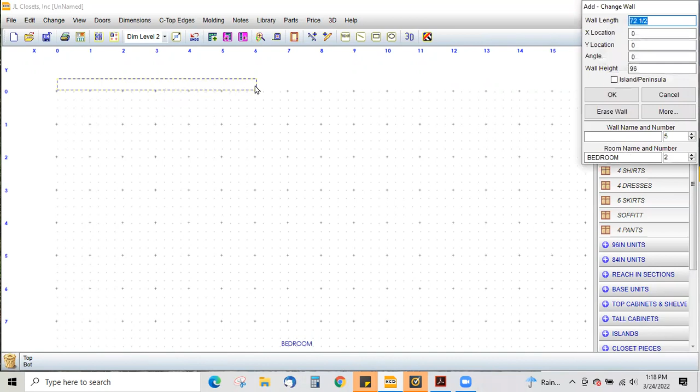All right, this video is going to cover soffits and ceiling pitches. So usually you'll have a space. I can't even say it's going to be underneath the stairs. It could be honestly anywhere. But if there's a difference in the heights, it's generally more often than not that it's under stairs. But as long as you know how to do it, then you just know how to do it.

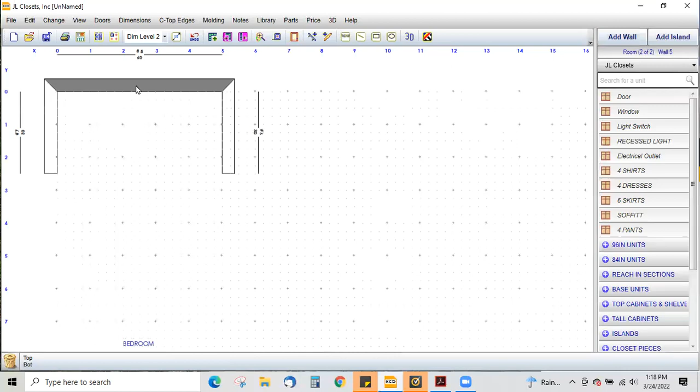All right, so usually they're three-sided. Even if they're not, this will show you at least how to use the ceiling and how to change the wall. Because the better you can show it to your client, engineering, and the installers, honestly, the better it's going to be for you. So let's assume in this scenario that this is a much taller space. Maybe this is 96 inches and maybe it comes down to 54. So I need to show that this wall height is 54 inches.

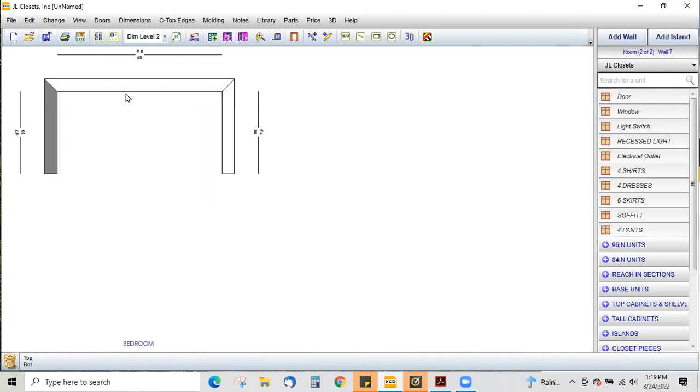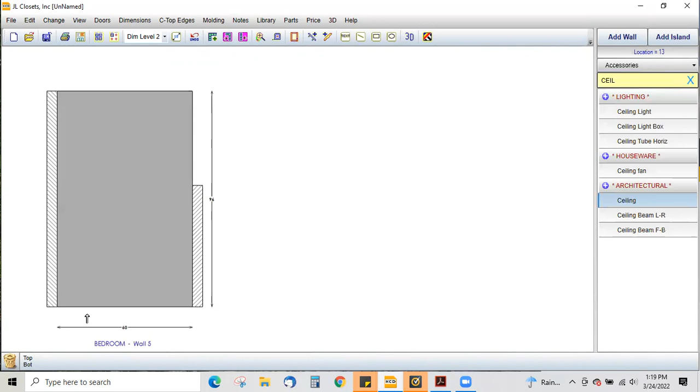So now when I look at my back wall, I can see that this really needs to be chopped, right? We can go into the accessories, go into ceiling. You actually have a ceiling, so you can design it. It's going to be based on the width here because this is a 60-inch wall. So I'm going to say it's 60 inches.

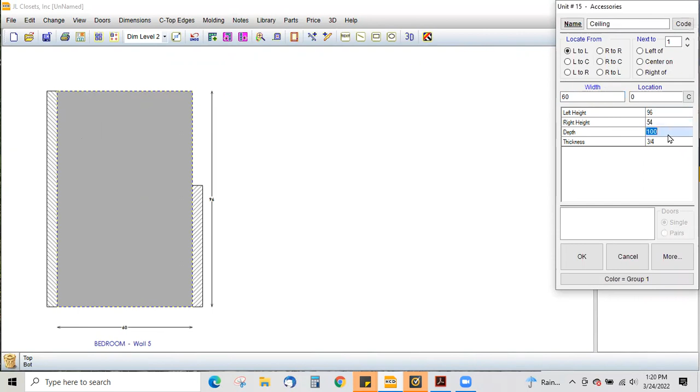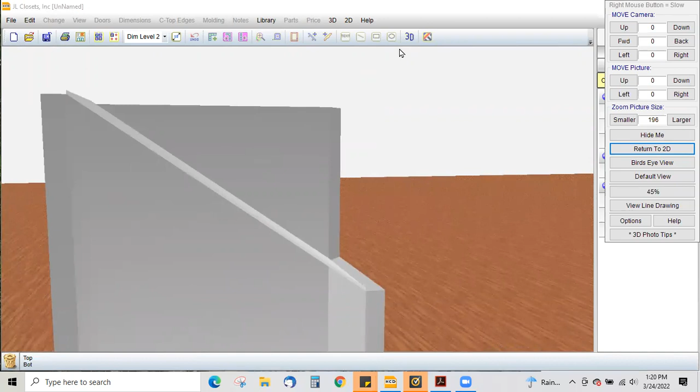When I design my space, it's 30 inches deep. I like to do it in the front view because I can see my left height is 96. My right height, we said, was 54. The depth of the space is 30. So now you can see a ceiling, but you still see the wall. And if you design on this and you put this into 3D, you'll still be able to see this funky little wall. It just doesn't look right. You don't have to do it this way, but if we're going to show it, it should be shown true.

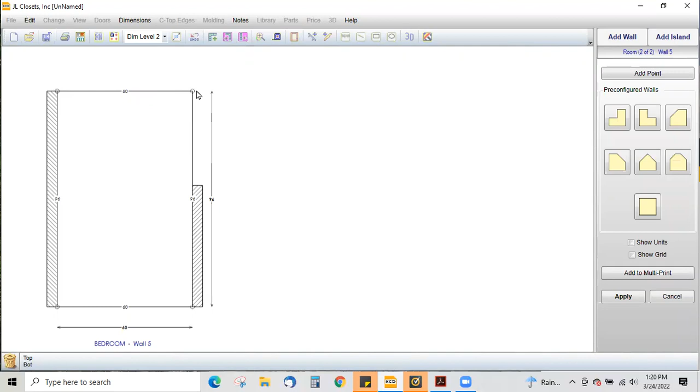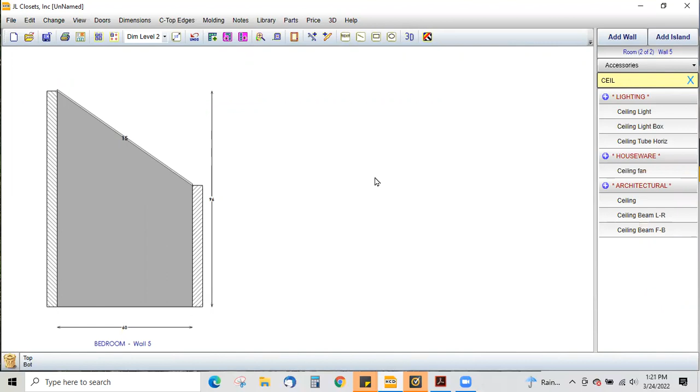So we're going to double click on this wall and we're going to click on more. You can edit the wall shape. So when you click on that, it gives you these little bubbles. I want to bring this bubble down to approximately 54 inches. When I hit apply, it cut off the remainder part of that wall. So now if I design something, now I can show it in true form. So I can put a unit underneath here. Maybe there's going to be some floating shelves, but now it's going to be a true and exact space.

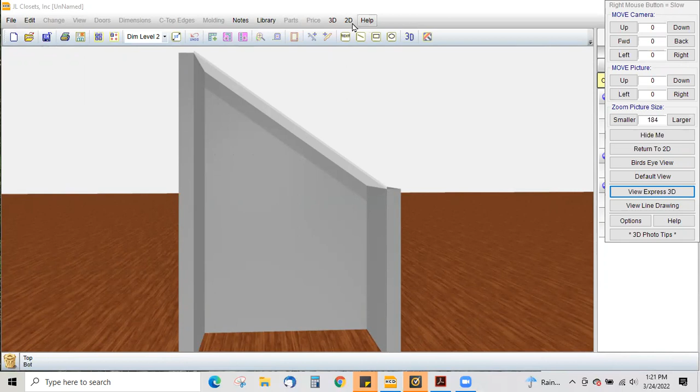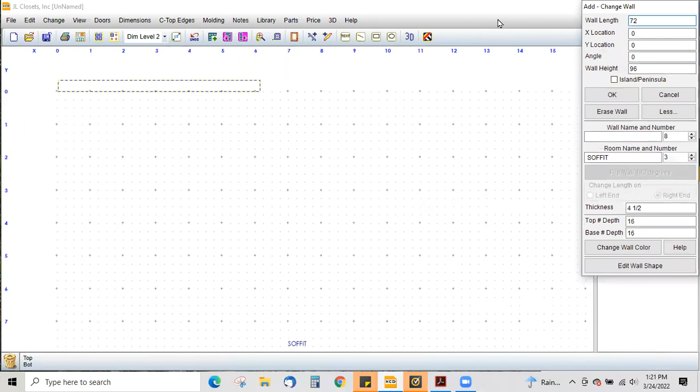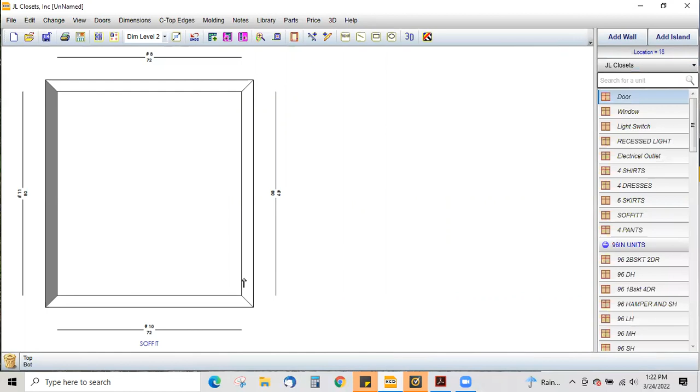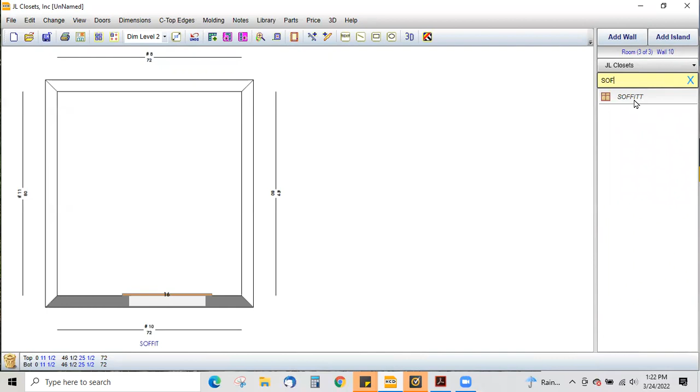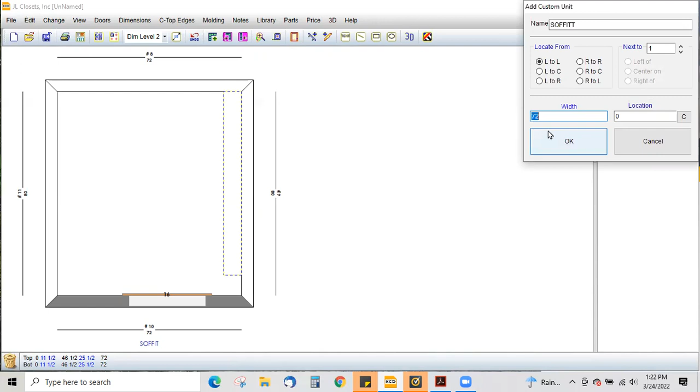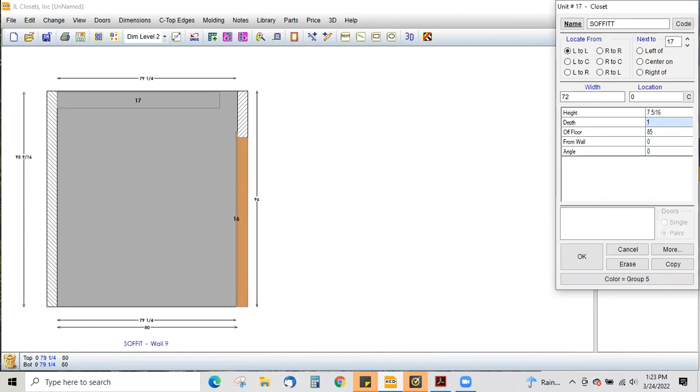But you can just search for the soffit and you can design it in. It could be the entire length of that particular wall. It could be just a portion of it. So you'll design your soffit to whatever you need to. You could also put this on the floor if you've got a bump up, like in a garage. So I'm just going to come to my front view because I can see it. You can't see it from the top view, but sometimes it's off the floor and maybe it could be wider. So we'll just say maybe 85 inches. Maybe it's 16 inches deep.

And you would generally measure these, you'll just do the math. So if you're taking your wall height measurement with a laser, you can do it to the bottom of the soffit, and then also to the top of the room. So easy math, right? If this is a 96 inch minus 85, it should be 11 inches.

Better to just design this into KCD so that clients, engineers and installers understand why perhaps you designed this one wall to be a lot less and maybe this wall a lot higher. And this has actually happened where I've seen designs and it went to the ceiling on every wall, except this one was smaller and it wasn't designed in there with the soffit. So I didn't understand. So the idea of your designs is to showcase what you can do without having to explain it.

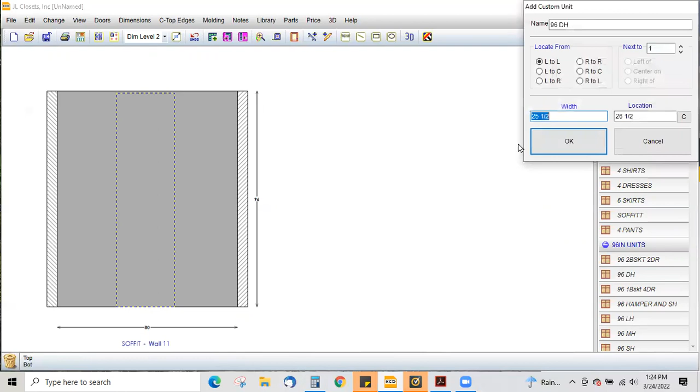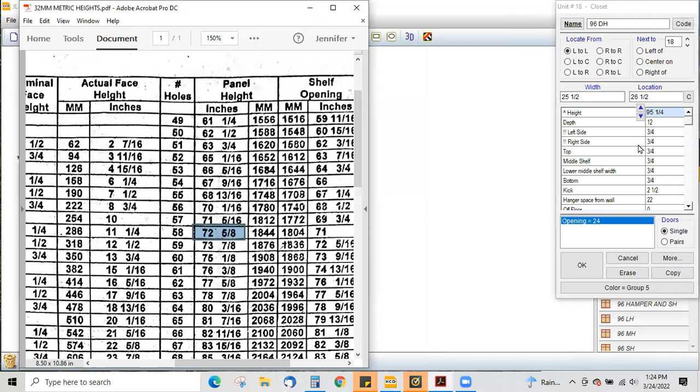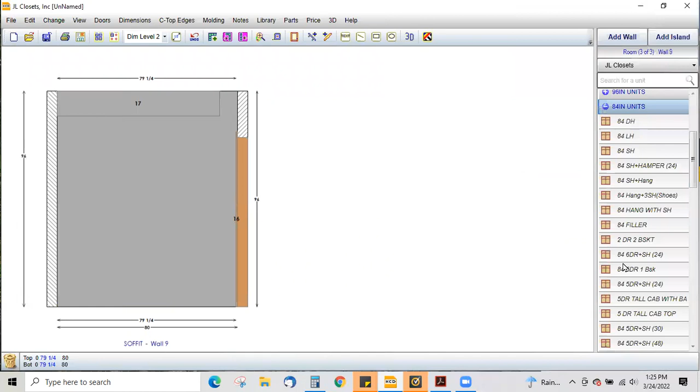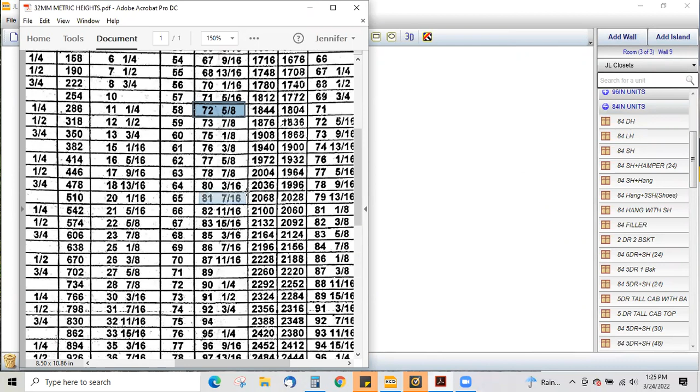So just remember too, we'll always go 3 inches below. So if we're a 96 inch wall height, I'm gonna make this 92 3/4. This is just for quickness right now. I'm going to come over here, perhaps do the same. And I'm aware that I'm not putting fillers in. I'm just showing. I'm going to use an 84 inch unit, especially since this is 85. So I'm going to come up to where my 85 is and backtrack it. I'll make it 81 7/16. So I am still 3 inches below my soffit.

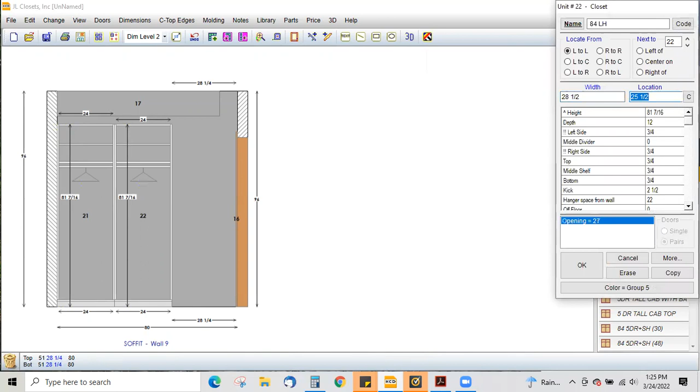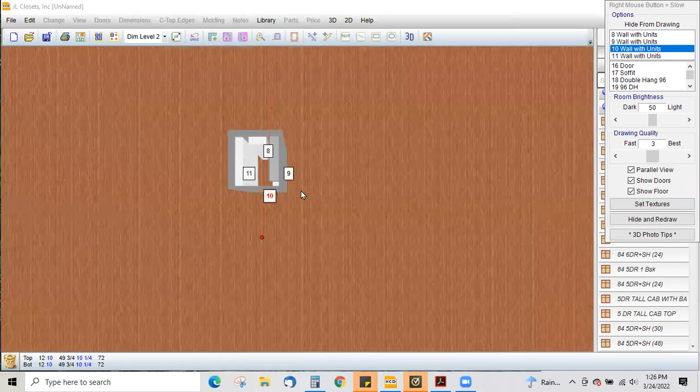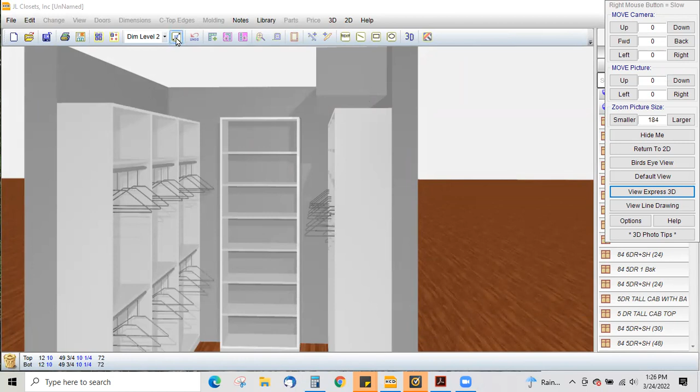So now I will put a shelf back here. I'm not putting the bridges on right now. I just want to show in 3D what this will look like. So now you can see there's a soffit there. So this is going to tell me I probably am not going to use a connector here at the top. And if I don't use a connector at this top, I'm probably not going to do one down here. I might. It just depends on the look the client wants, especially if I'm going crown to ceiling. Oh, I made a whoopsies. 92 3/4. Thought it looked a little weird.

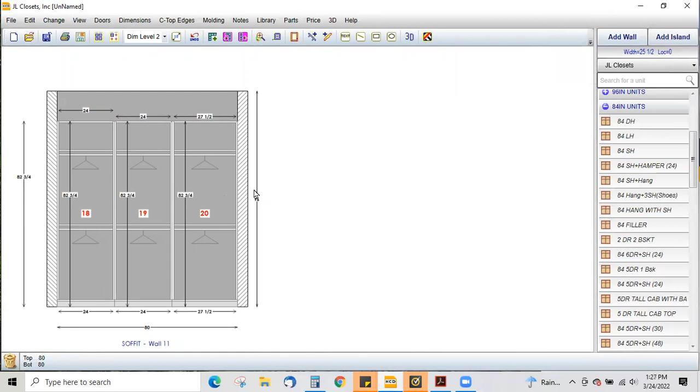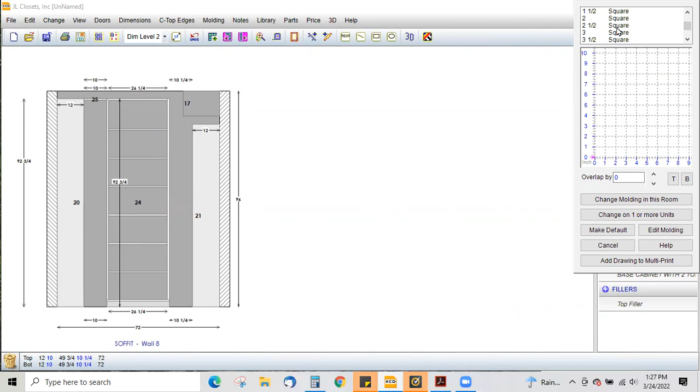So a way to do this quickly, I'm going to click on these and this guy. I'm going to change all selected units and make the height the same. So now they're where I need them to be. I will probably, just because these are the same, put a bridge up here so that when I do my molding to the ceiling, it will show properly. I'm not sure if I would use a bottom here because I'm not using one here. So I'm going to put my molding on here, my square. It's generally 2.5. I'm going to put it up here and here.

But now it can show that it's going to the ceiling. So this is what it will look like now with the soffit. If you didn't have the soffit in here, it just might look a little like, why did they do it like that? Showing it shows the client also the reason you built to a certain height. Most often I do forget.